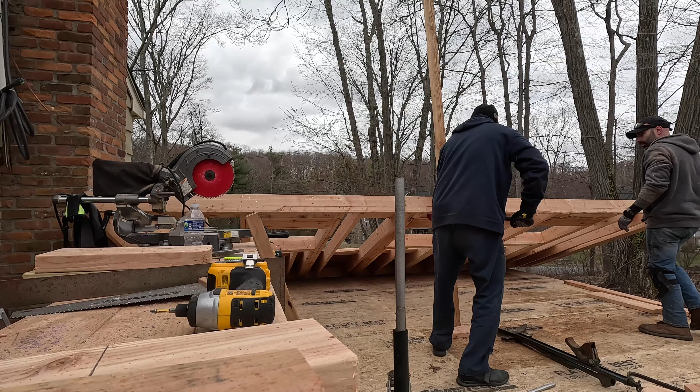As I sit here recording, this is day 12 of framing the North Wing project. If you saw the first framing video, I basically have 28 days to get this thing done before I've got to get back to the real world and get electricians and plumbers going. And so we're on day 12. In the last video, you saw that we finished the floor joists, blocking, decking, all that good stuff.

So in this video, we're going to be talking about the exterior walls of the first floor, which is our main level, the bedroom exterior walls. I want to jump into the Revit model as well as go back to some of those clips and slow them down and talk about some of the lessons learned between design and construction and having to build this thing with my own hands, and some of the pros and cons of the approach we took.

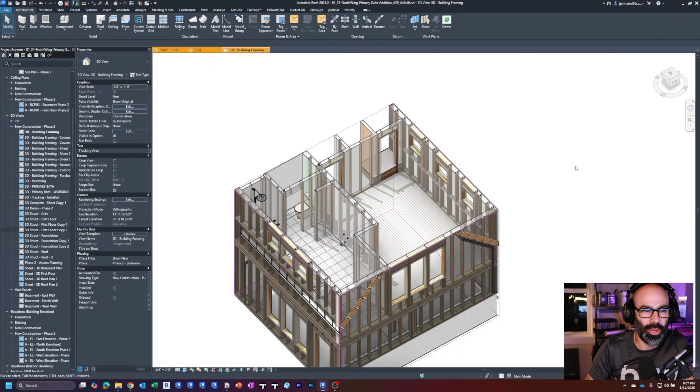So first, we'll take a look at what we built here. Basically, this exterior wall and this exterior wall. And actually, as of day 12, we also have this bearing wall in the middle here. But what I really want to do is focus on these exterior walls. First and foremost, I wanted to talk about looking at these walls as an architect versus a contractor or framer thinking about how to most efficiently lift them, right?

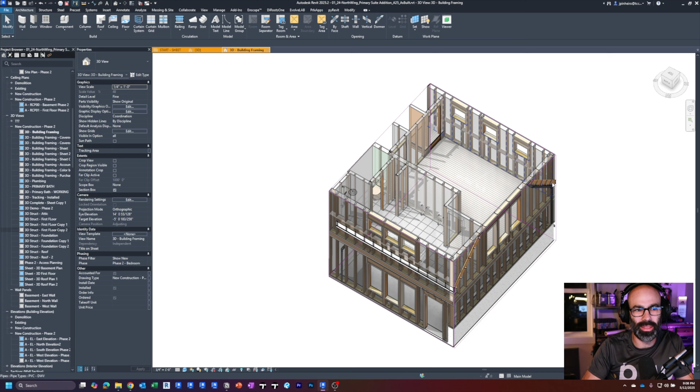Up until this point, we've only had one wall that we were able to build on the ground and lift up. And even that one, we had to take pieces off of it because of where the concrete was. Luckily, over here we had this wall and this wall we were able to build on the deck and lift up. But even this wall here, there's an existing fireplace here, so we had to lift it up and move it around.

As you can see from this time lapse, it looks simple. But once you get this up, even with two people, my father and I here, this is Carlos, my dad, we had to lift it up and then slide it over in place by the fireplace. And so lifting is one thing. We've got this wall jack, which actually helped out quite a bit. I will say, getting the wall jack onto the 2x4 can be a pain. The pins weren't very strong. But once we got it to that point, getting it up in the air wasn't too bad.

What you're seeing me do here is crawl under to remove screws, because we accidentally screwed in the toenails in the wrong location and they weren't giving in. So that's a whole other lesson learned there. But as we're lifting this wall, the wall gets up fine using these wall jacks. But you'll notice it's hanging off on the edge here, about 2 feet or so, whatever the width of the fireplace is.

So now we have to move it all the way over. Seems like an easy task, but this is a pretty heavy wall. What we ended up doing was using a strap ratchet sort of thing, as well as a sledgehammer, which you're seeing me do here, sledgehammering the thing along. And so we did get it in place. It was just way more effort and energy than we wanted.

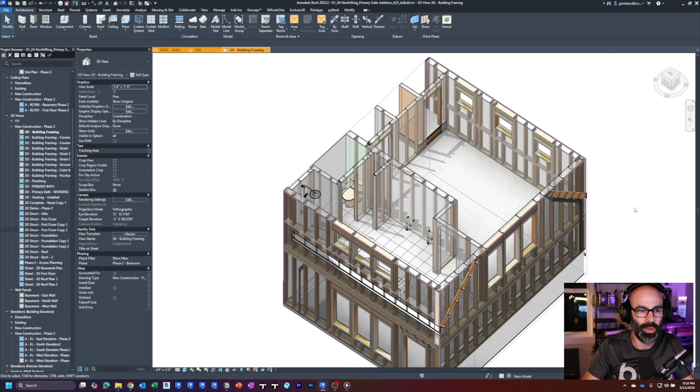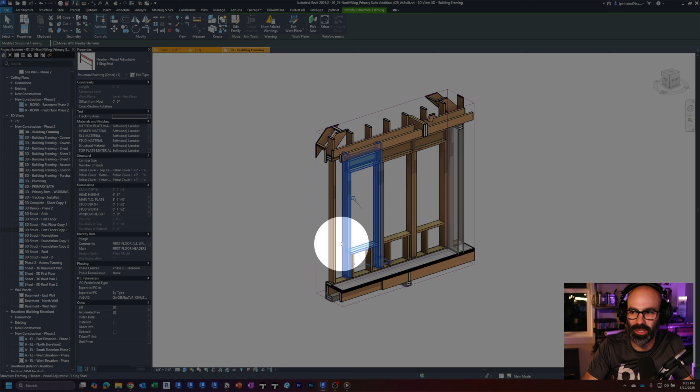So when we have 3 windows here, for example, on this side these are individual windows, and if I isolate these windows here, we did three headers, 3 individual headers, 3 individual openings. That let us have 3 24-inch windows instead of 1 6-foot window unit. That was something I toyed with a lot in the beginning. Because I was framing it myself, I wanted to make sure these windows were easy to get up onto the second floor and into place.

Those window units, especially 6 feet wide, even if it's aluminum or, like this, a fiberglass material with wood, get pretty heavy. I didn't want to have my headers be 2 11-7/8 LVLs and deal with heavy headers and all that. So I thought this was a good idea, and in the end I think it was a good idea as far as lifting the windows, because they're much more manageable. One person can actually pick them up, which is nice. You don't need 2 people.

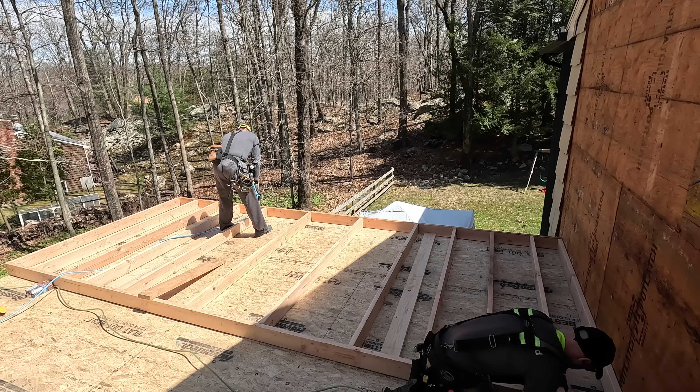It would have been a 2-person job. But the one thing that I did learn is how much labor it added to building these walls. And so as we jump into this time lapse here, you see this is us building what is the east wall of the project. And so you see this is one that we could actually lift in place, which is awesome. But you see I'm adding my studs here.

Okay, so now we're starting to build the windows, and you can see, so there's a jack, there's a king in the middle, then there's a jack on each side. And then you have your headers, and then you have a jack for the sill, right? And then you have your cripples and all of this other stuff.

And, you know, looking at it here, when you start looking at these actual walls, there is just a ton of wood in these walls. You know, the jack studs are in place here. And now we're starting to put the header, the cripples, or the plates for the header. So there's the plates there. And now you'll notice there's another set of jacks to hold the sill. And then we did a double sill, and then we did some cripples below that.

And so even though this was just 3 24-inch by 24-inch windows, it took a ton of time and effort and labor to do. Whereas if this was a single opening window, so let's say it was a single window with, you know, three 24-inch window units, let's say, then it would have been, you know, 2 jacks, 2 sill jacks, and then a big old header.

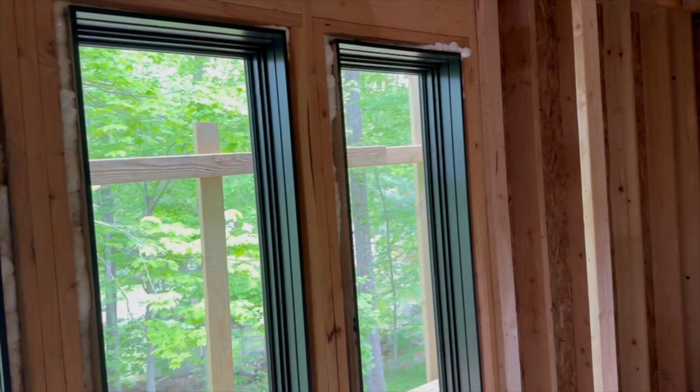Just wanted to jump out here real quick to talk about that stud pack I was telling you about, so you can kind of see it in person. All right, so here's the windows. 1, 2, 3, 4, 5. All right, so you got 5 studs. You know, one's holding the sill, one's the jack, then you get a king, then another jack, then a king. If I zoom out, you can see how much wood is involved.

So as you can see, I'm editing the video now, so it's a little later down, but I wanted to show you that because I thought it was a good idea to show you in person what that crazy stud pack looks like. So yeah, windows were definitely lighter, but lots more wood, lots more labor, as opposed to, you know, you basically would eliminate these 3 studs, these 3 studs, and those 2 studs, and you kind of have it across there. So just something to think about if you're planning on doing a 3-window unit over 3 individual windows.

When I install windows, I guess I'll give you an idea of how I thought that came out. Like I said, the windows are easily manageable, you know, by one person. So we'll see if it was worth it, but just something to look forward to there. If you're thinking about maybe reducing the cost by doing less window units, or maybe making it easier to build, there's pros and cons to that approach.

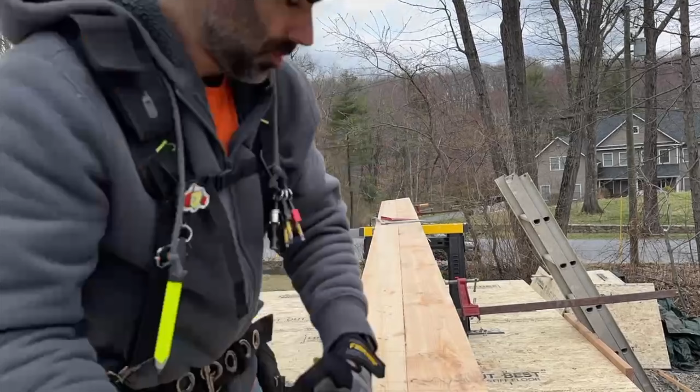And one other video that I wanted to show is layout. I did a couple of these time lapses. You've probably seen them in a few other videos. This is me doing the layout on the sill plates. This is one part that I absolutely really enjoyed. As the person who designed the project, lived the design process for the last, you know, year of it, going through and laying out each individual stud, each individual window, even doing the floor layout in the actual level is something that I truly have enjoyed.

As an architect who designed the project, being able to go out there, first it was kind of cool because, I mean, you see I had the iPad there, but truth be told, the layout I pretty much knew in my mind. I had the iPad more for rough openings, but being able to go out there and just lay this thing out by hand with pencil, and then construct this building that I spent the last 12 months designing on the computer, was just absolutely super rewarding.

And so I took a bunch of little videos of the layout stuff because I thought it was super fun. And as an architect, being able to lay out your own project and then build it with your own hands, super satisfying and gratifying. If you have the chance to do it, I highly suggest it.

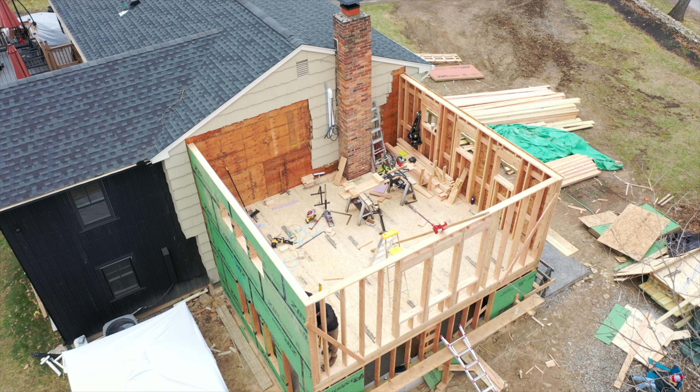And then finally, as we look at this aerial video of the north wall going up, the final tilted wall, you could see that's the point that we got to at this point in time. As I'm recording this video on day 12, that wall is up. It is mostly sheathed and zipped, and so we're making good progress, and I think we're gonna make it. I think we're gonna be watertight before the 28-day mark, so I'm super excited about that.